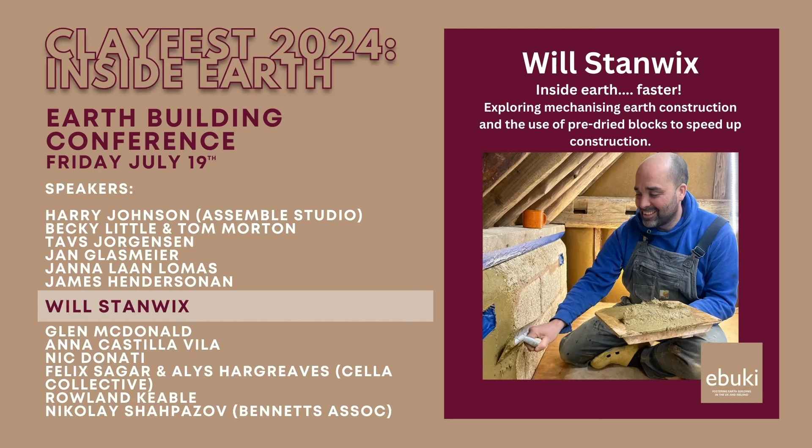My name is Stanwix, and I've worked in natural building for the best part of 15 years, predominantly as a design and build contractor. And I'm sorry, I always have to read the intro because it's the only bit I ever forget. I love hempcrete, I love clay, and I love solving construction challenges.

When you gain experience with particular materials through failure, triumph, or time, you get pulled into other areas of construction. So I also assist self-builders. There's one here today somewhere. He's out there. Architects and engineers when they're working with natural materials, and I also produce, import, and sell building materials. But predominantly, I'm a builder, and that's where my passion lies.

My journey inside earth began at HG Matthews, where I worked for 3 years, and I finished that about 4 years ago, I suppose, and predominantly focus on avoiding doing labour-intensive things like that, and instead using machinery, earth blocks, and other methods to bring earth building to a new audience. So I'm just going to talk about a few of my past projects which highlight this. Some of you here actually have worked on them, so sorry, you'll know all about it. But here we go.

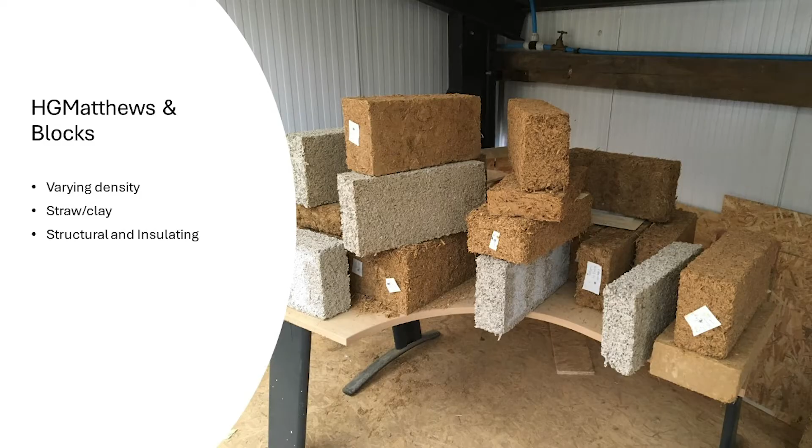So at HG Matthews, I was pretty much set free by Jim, who's up there in the corner, to experiment with their clay and their straw. So we made lots of varying density blocks out of the clay and the straw. The one in the front there is a light earth block, clay and straw. The middle one is, I suppose you call it light hemp earth. It's hemp and clay, and the other one is a hempcrete block.

So we made these blocks, and then we tested them at HG Matthews to see what we could do with them. And the light earth blocks were great. These ones were more like an insulation batt rather than a block because they were so light. So we built an office and we stuck them between the studs. And their thermal conductivity was very low. It was like 0.05. But they were difficult to make, and at the time we didn't have the machinery that could make them on scale, but I think that has changed slightly recently.

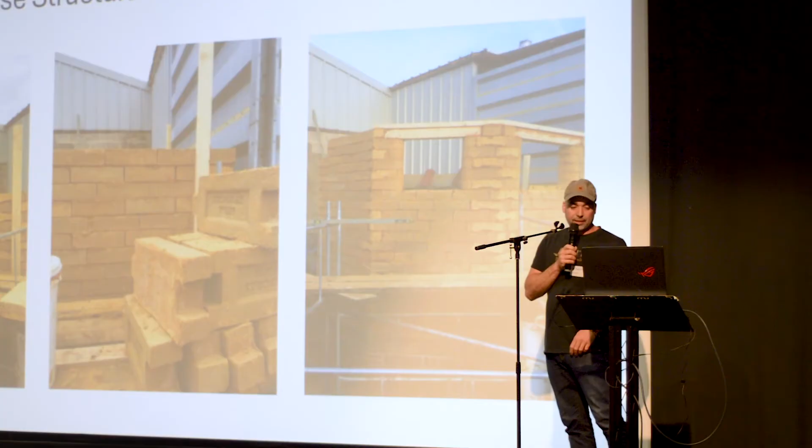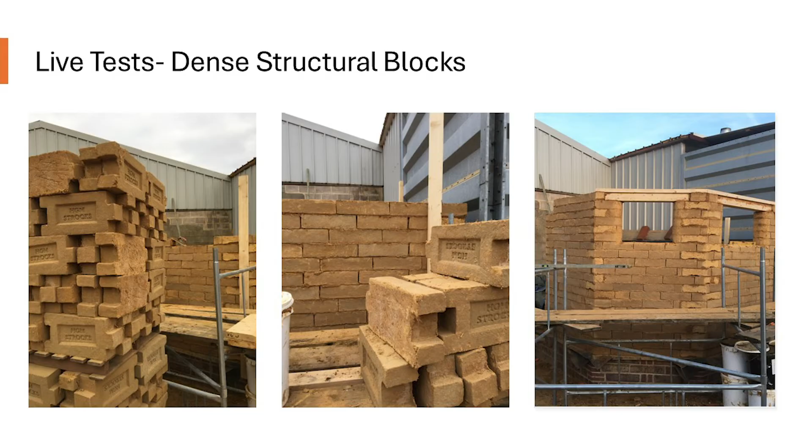So we looked at dense blocks, and at the beginning we made them with a little sort of a notch in them, so you didn't have to put mortar in the perp joints. And we really liked them. We built a new toilet block at HG Matthews, and they were fantastic. And this is the same toilet block. This is a photo taken in January 2018.

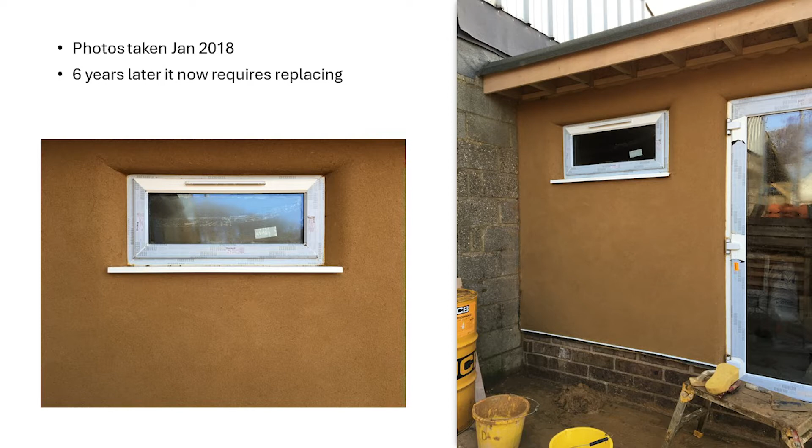And those of you who were at the Brickyard this week, I don't know if any of you went and saw this toilet block, but that is just a base coat clay render with clay, straw, sand. I didn't even put 2 coats on it. For some reason, we didn't get time. And it's only just now needing properly replacing. There's a square that's fallen off it. But the building inside is fine, the blocks are fine, it just needs another coat of render. And there's a very, very small overhang, it always gets rain on it. So it is surprising how tough these materials can be.

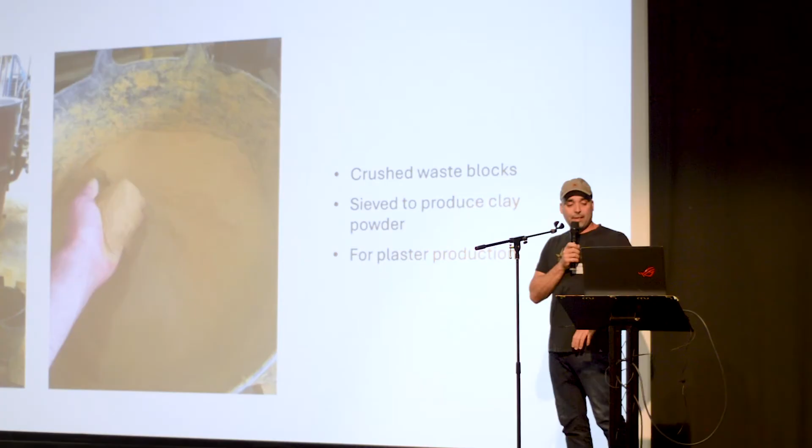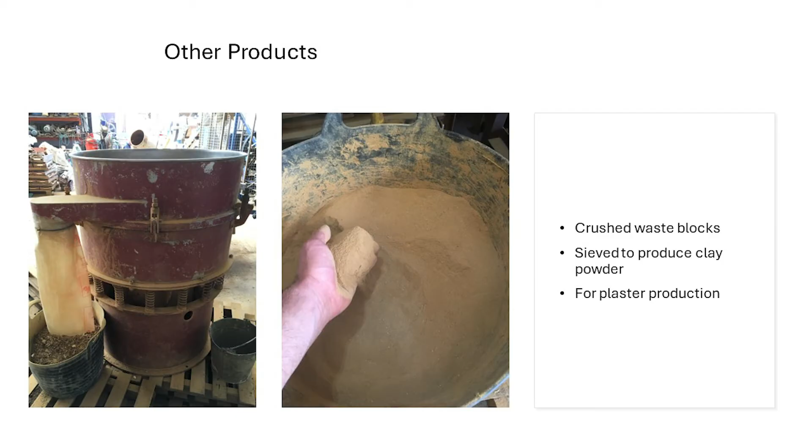So the other products we looked at, this is clay powder. So all the waste products we crushed and we put them through a sieve that's in the picture there. And we made clay powder, which you can make clay plasters, clay mortars, all sorts of things with. And they still make this now, and it's a really, really nice clay for making a clay plaster.

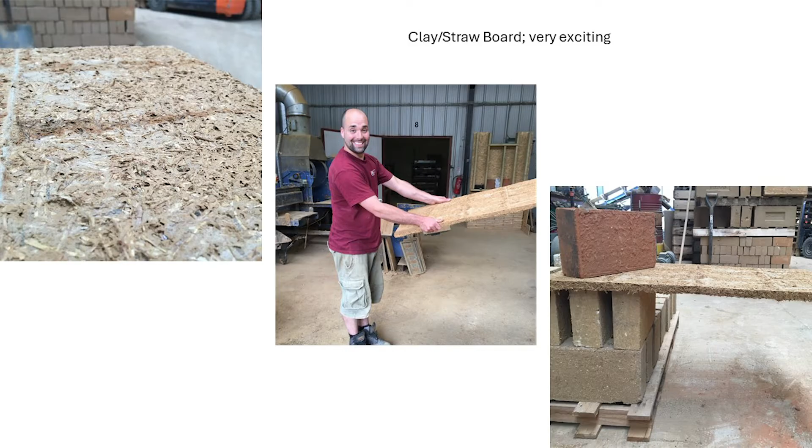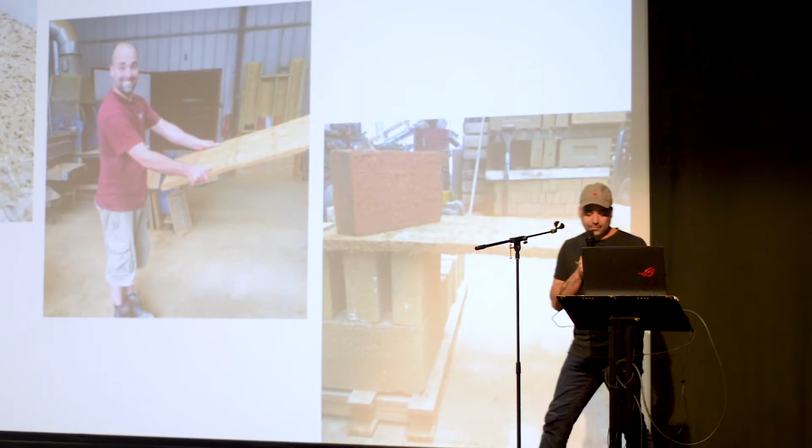Other things we did was a clay straw board, and that was very exciting. But again, to make that on large scale was just too expensive, too much machinery, but park it on the bench for later. But again, 25 mil thick, straw and clay, and it was a fantastic board. Hempcrete blocks were even more exciting for me, but I'm not allowed to talk about that too much. Roland says no.

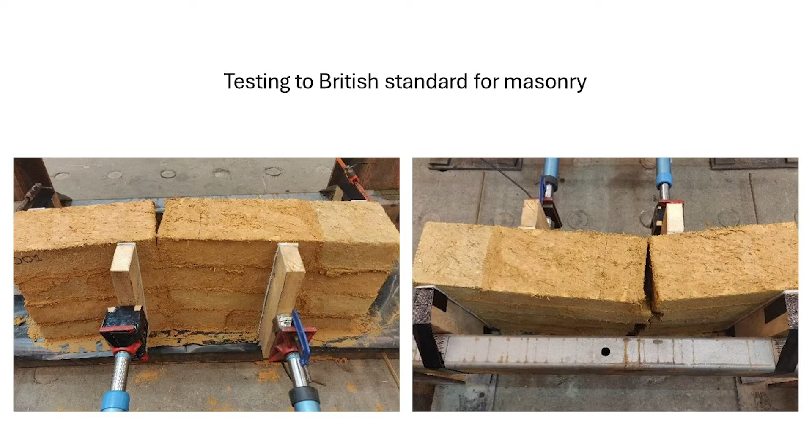So we thought the dense blocks, the strocks as they call them, they're made from the waste clay they dig through to get to the brick making clay and the waste straw from their farms. So we took that forward to testing at the BRE, and they've been fully tested to the British standard for masonry, which means engineers can engineer with them and we can make them properly on site and building regs can be okay with it.

So this is the bit about building faster with blocks: the fact that they're dry, and now we can engineer with them, and now we can build houses with them. So structural earth, we took that through to what you'd say live tests, and this is a garden office nearby.

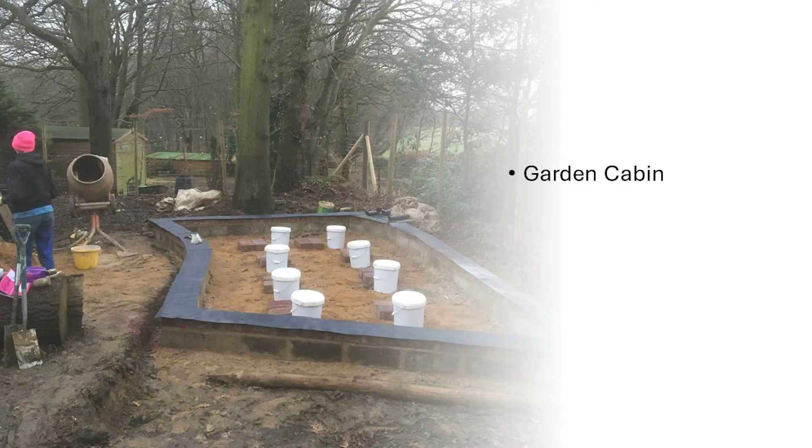Sit it on a masonry plinth, and we built a little cabin for a client just to see, just to get to know them, so we can tell other people about our experience and give them advice. And they're great. We found out you can drill straight into them with big screws, which means you can drill these posts in and plumb and run your strings off that really, really easily.

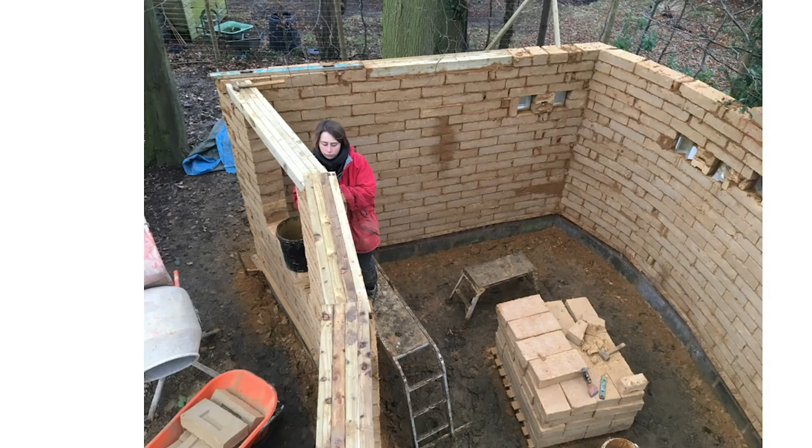We built it in the winter, too cold for lime or cement when we were building this, but actually, as long as you could mix the clay up, it was perfectly fine to build with. You did, however, have to cover it over at night from potential of rain. And again, the lintels just screwed straight into it. And we managed to get a nice thin joint because they were quite regular.

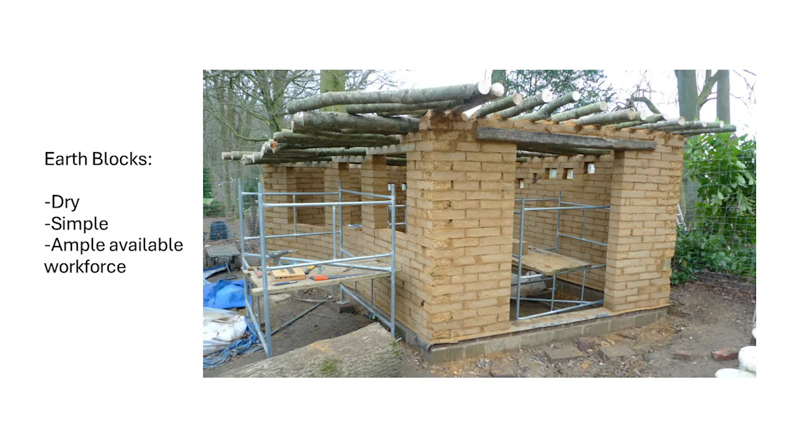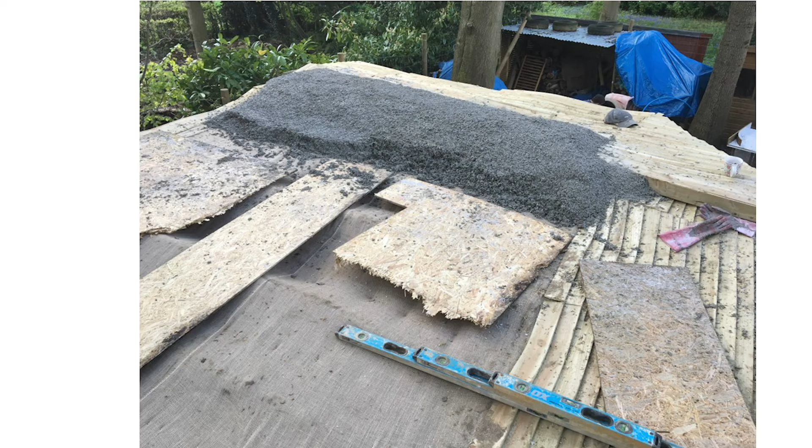I'm going to skip through this bit pretty quickly because it's about hempcrete. So we put the roof poles over. These poles are from the neighbour's garden, and then Hessian straight on top of the poles, stapled down, and hempcrete poured straight on top of the Hessian. So there's no plywood deck or anything like that. It's essentially a hempcrete roof deck.

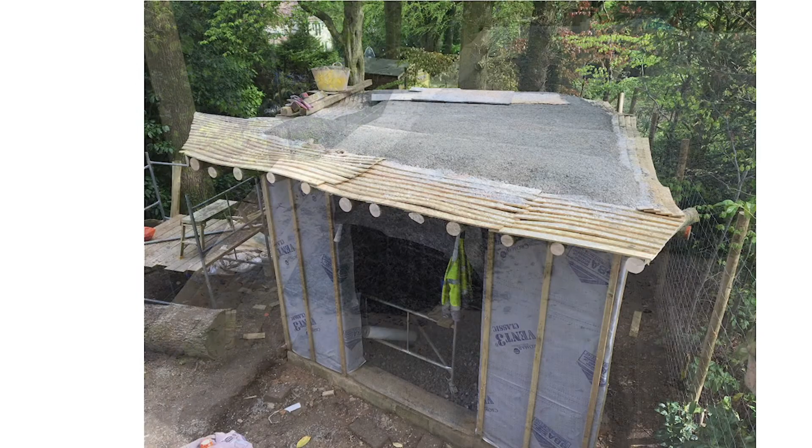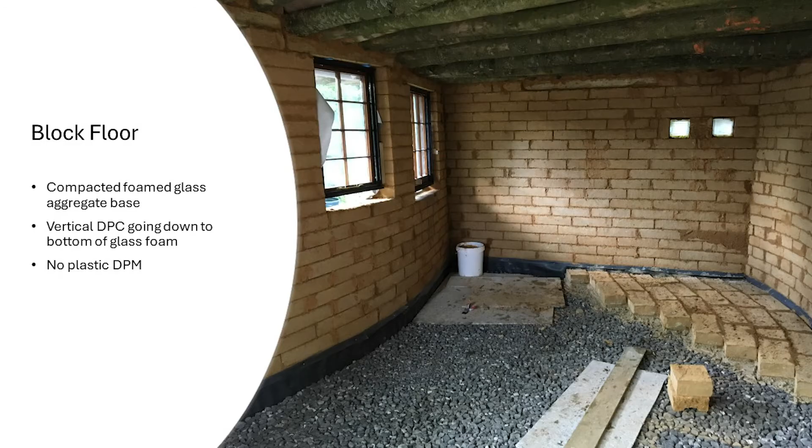Inside we did a strock floor, so the foam glass you can see at the bottom, and then, very important, the damp-proof course comes down to the bottom of the glass foam layer, and then laid the blocks straight on a lime mortar with a clay mortar between them. We were going to do a poured floor at this point, but the client liked the look of it so much we kept it. We plastered it, and then we oiled the floor.

That's the cabin there, painted with clay paint. And they came up really nicely. They came up like flagstones. We oiled them with linseed oil and then beeswax on top. And they're really, really tough, really, really strong, which gave us the idea for cutting them into little tiles if you had a screeded floor.

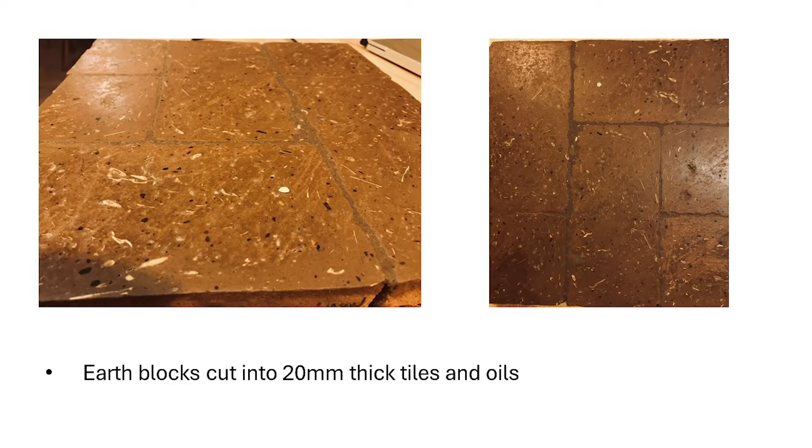So it's the strock itself cut into 20mm sections and then laid. This is a sample for a customer, but they were laid as a floor tile. So there's 2 flats in London with these floors. And on the buildings tour, there's a building called the Surge Hill Project that we've got a floor like this. And then the big live project, Bellingdon Village Nursery, which you'll get to see as well on the tour.

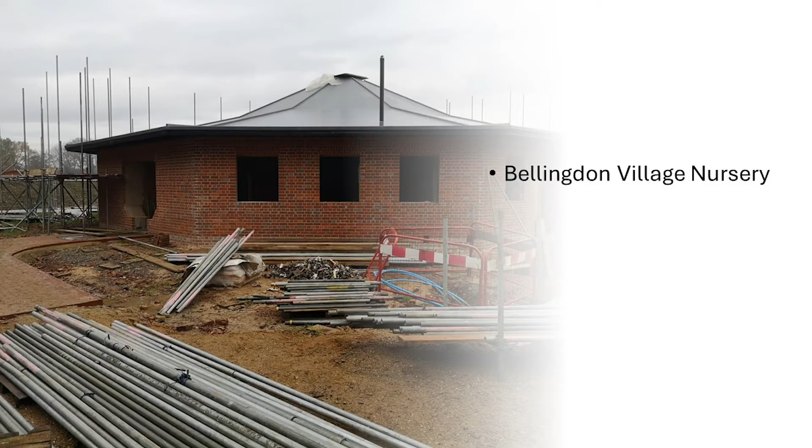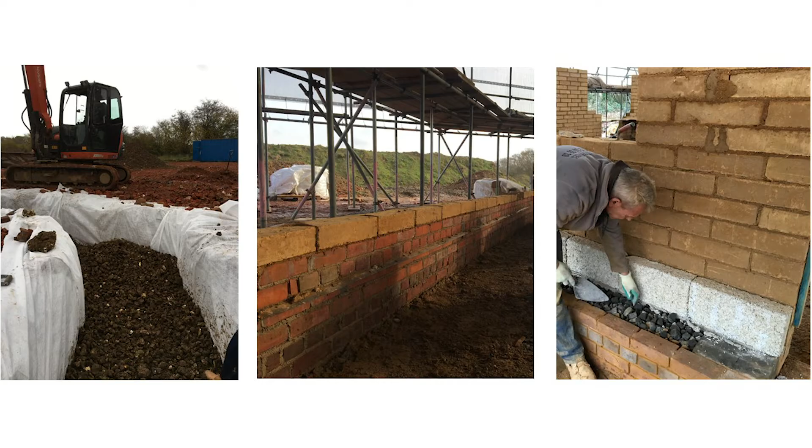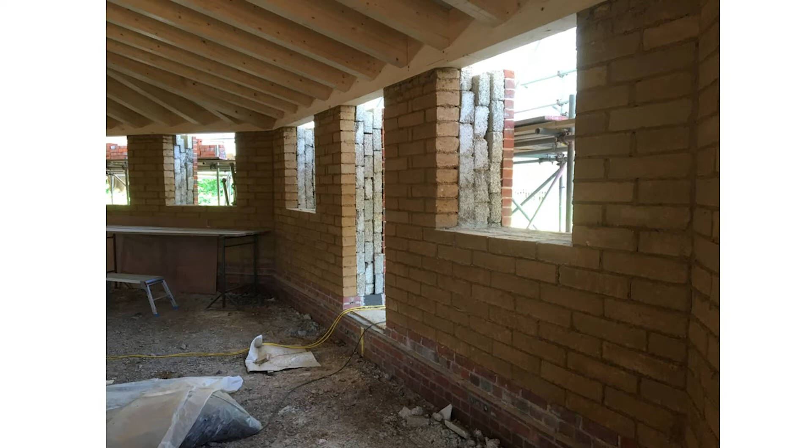This was built by HGMatthews. This was the big test for the earth blocks. So we've got a rubble trench foundation, brick plinth, and then start the blocks above the DPC. Hempcrete again, hempcrete insulation. And there you can see all the big roof structure all sits on these, and they're 160mm wide. They're not even the full size one. 300mm of insulation and a brick skin on the outside, and that now has a green roof on it as well, so those blocks are taking a huge amount of weight.

And if any of you have been there or heard about it, it has a central dome as well, so it's really worth going and visiting it. And that's, again, the same mix as the strocks, the earth blocks, but a special shape for producing that dome.

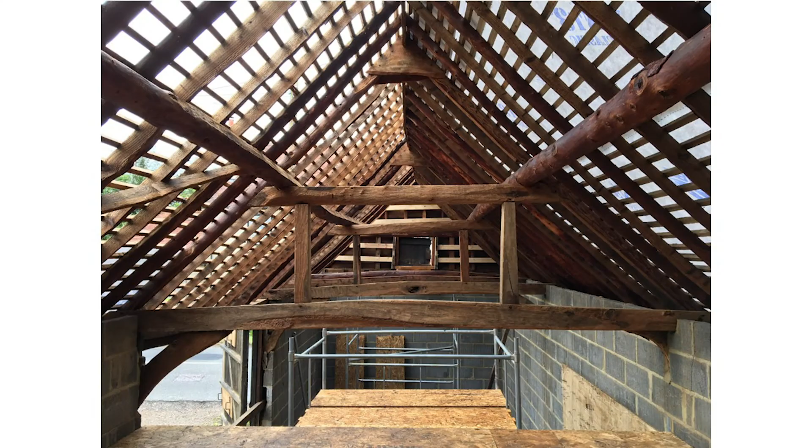So after I finished at HGMatthews, I started thinking about earth as insulation, because I do a lot of hempcrete, which I'm going to try to stop saying now. And that's insulation, basically. So this is where I thought I'd test it on my barn. So this is the roof structure of my barn at home. And I left the old laths on because they were oak and nailed very well into the little rafters, and I didn't want to take them off and risk breaking the rafters.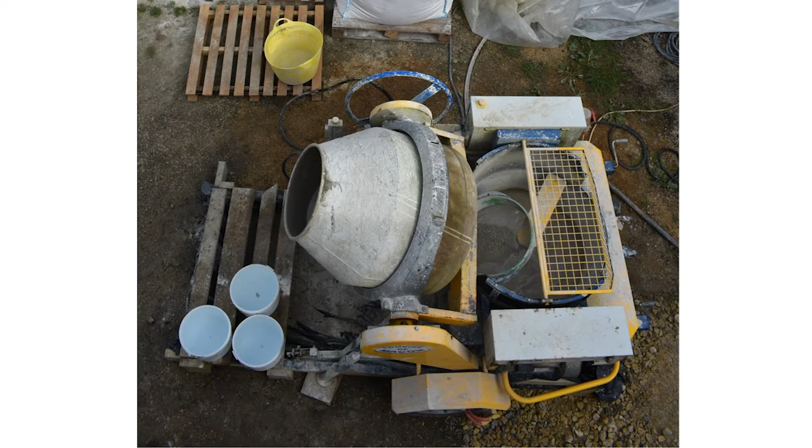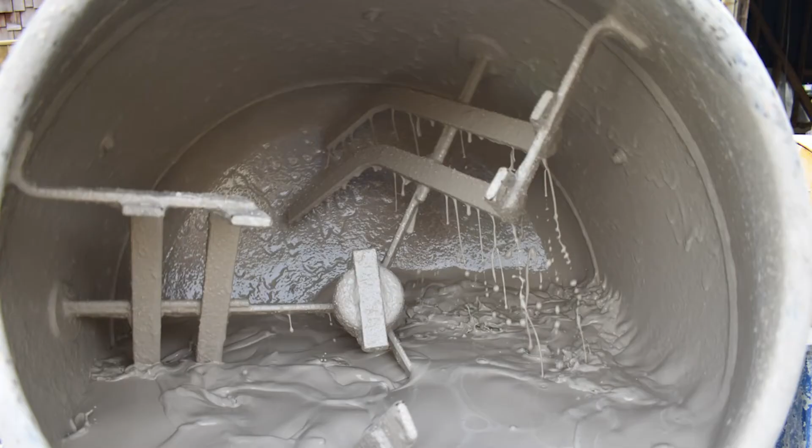And I got this machine. This is a hempcrete spray machine. And so you put a liquid in here, and it tips it over and pumps it from this thing here. It's an agitator or a pan, and it pumps it up to a nozzle. And have I got the picture of? Yes, and the hemp goes in this separate box here. So that's a picture of the clay slip in the drum. So that is clay powder and water, which gets pumped to the end. And the hemp, dry hemp, goes in this box here where it gets blown to the end.

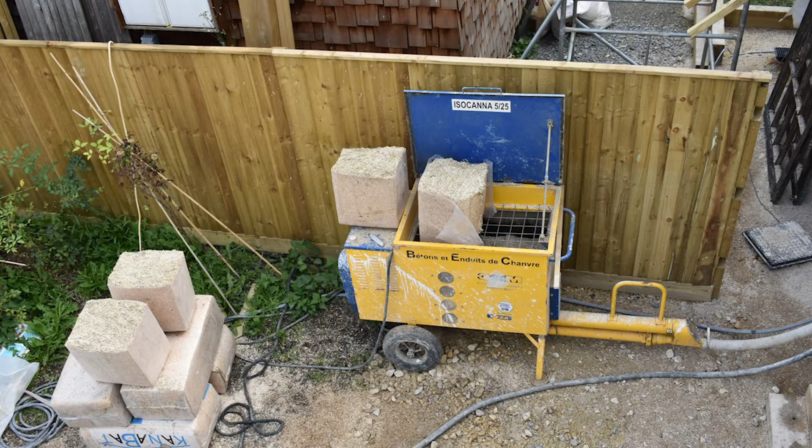This pipe here carries dry hemp right up to the person on the lance or wand or whatever you want to call it. This carries a slurry, so it could be a lime slurry or a clay slurry. And this carries switch wires and compressed air. So that all gets pumped up to the person, or the hemp gets blown, but it all goes to the person at the end, and it comes to this. So you get your dry hemp coming out through the middle, and then the slurry gets sprayed with compressed air through those nozzles at the hemp.

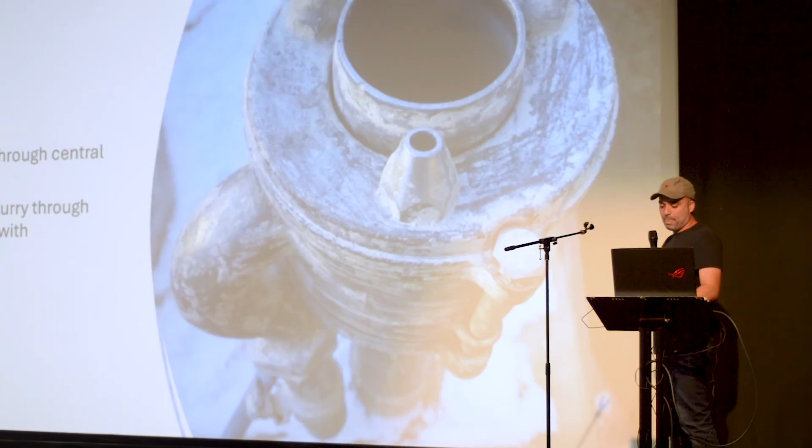So the hemp's sort of twisting through the air, and then the slurry's spraying at it, and then it mixes in the air and sticks to the wall, or wherever you're spraying it. So this is a Hempcrete spray machine, and this is what it's been used for, and this is what it was designed for, but I thought I'd try it with clay.

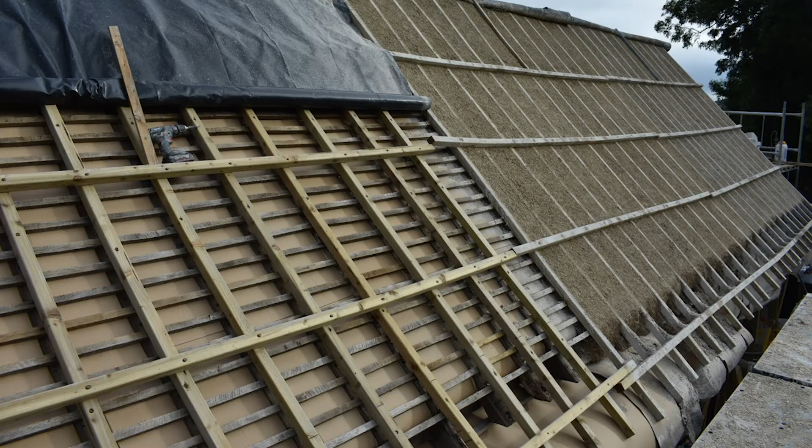So I stapled this cardboard to the underside of the roof. It's stapled to the old roof battens. And then I piggybacked with this 2x2 on top of each rafter. And this was just for me to stand on as I did it. And then I stood there on those and sprayed the insulation down at the roof.

And that shows it there nicely, the cardboard that I put on the underside. Once it was finished, I scraped it all off, and I got a lovely flat roof. Well, not flat, but a lovely smooth roof like that.

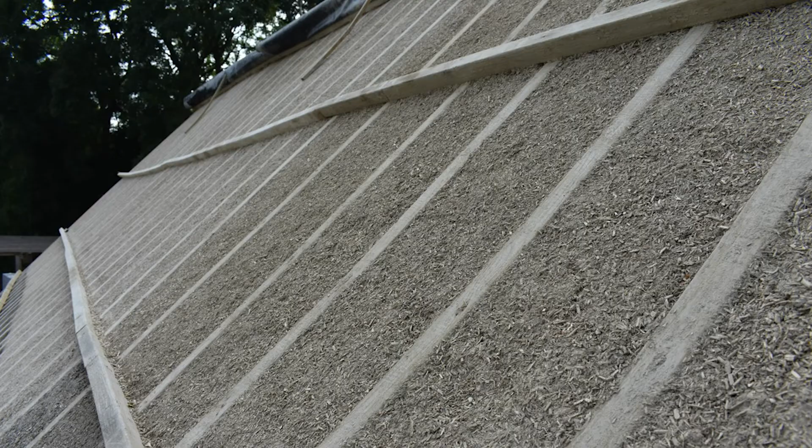That's my dad. He's 60-something. I've got a bad back, and we did that in a week fairly easily between us, and that's what he was doing most of the time. So that just shows how easy it can be. You know, you could do it with hands, you could do it with lots of people, you could do it with buckets, but you could also do it with your dad.

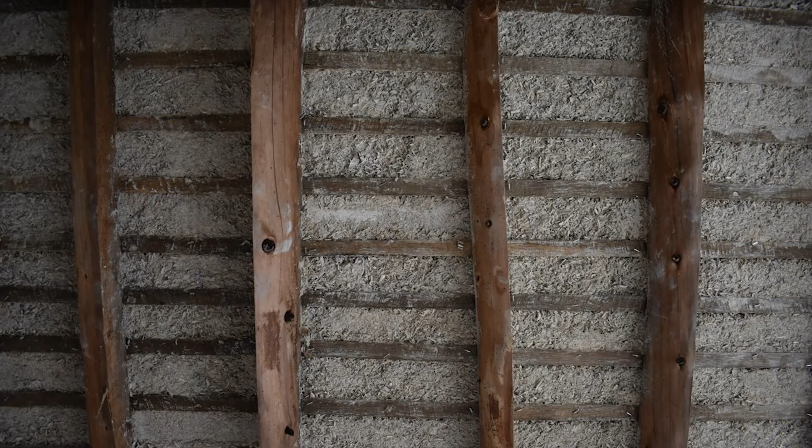Then on the underside, 24 hours later, I pulled the cardboard off, and that's what I was left with, a nice substrate to plaster onto. This is just showing the Hempcrete wasn't enough insulation, and I've gone with 2 skins of 50mm corkboard, which will keep the undulation of the roof, and it's the lightest board that I could think of because my rafters were tiny. And that's the finished roof underneath the new tile battens.

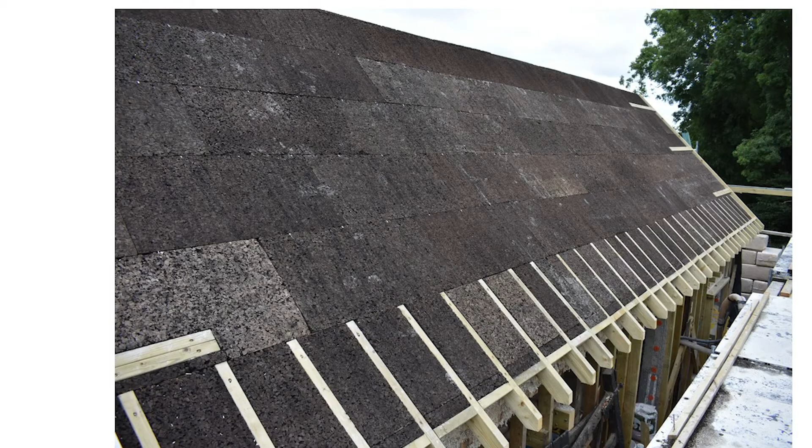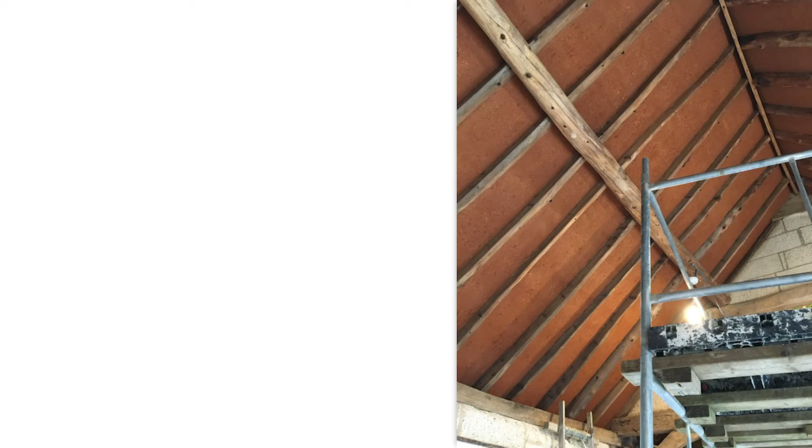And so the barn's about 300 years old, and the original tiles went back on, except the broken ones. And the broken ones, I bought another machine for, which we'll see in a minute, which crushed them up and mixed them with clay and straw and plastered them on the underside. So they spent however many years on top of the roof, and now they're broken and they're on the underside of the roof. And it's quite nice because you've got clay as the finish, clay as the insulation, and fired clay on top of that as the roof finish.

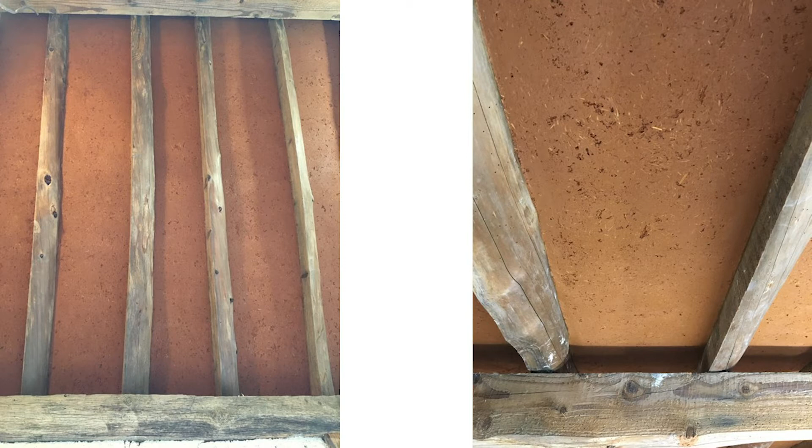It's just a couple more shots of it. And if you visit, my barn's also on the visit list tomorrow, and you'll notice that I like textured plasters. And the tiles went into the mixer as buckets of broken tiles. They weren't crushed and sieved and this and that. They just went in as buckets of broken tiles.

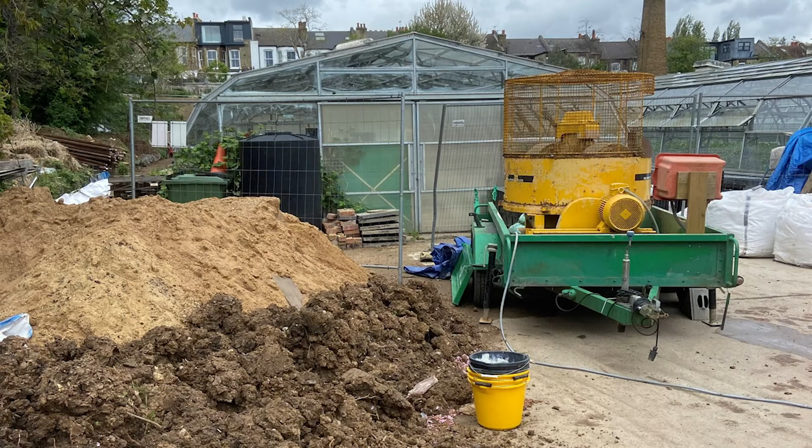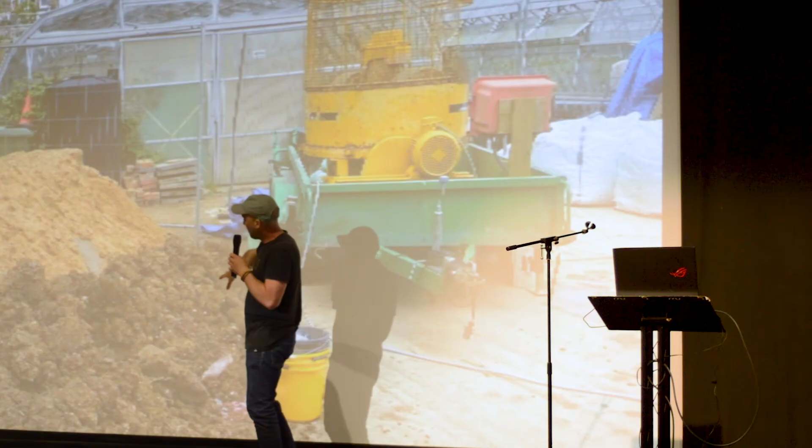So then I thought about site processing. This is in North London, Wolves Lane, a community project. And that's the mixer I'm talking about there, which a lot of you would have seen during the week. It's got 2 big wheels that go round and round and crush everything up. This is the clay we had. So it's 3 straw bale buildings. This is the clay we had, and that's the sand that was left on site.

I need a clicker thing, don't I?

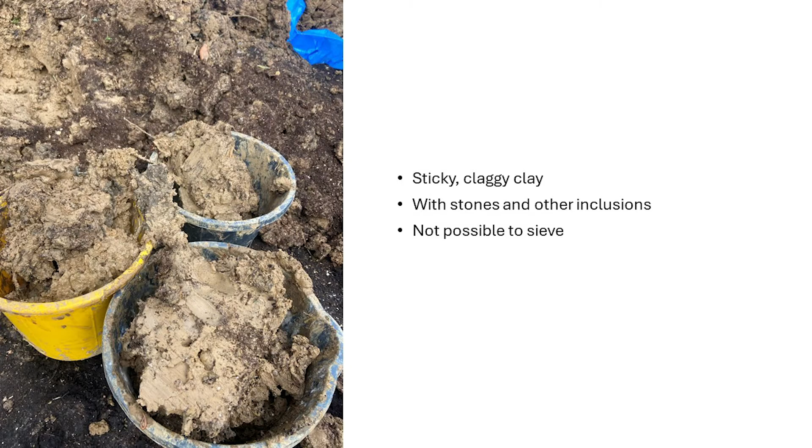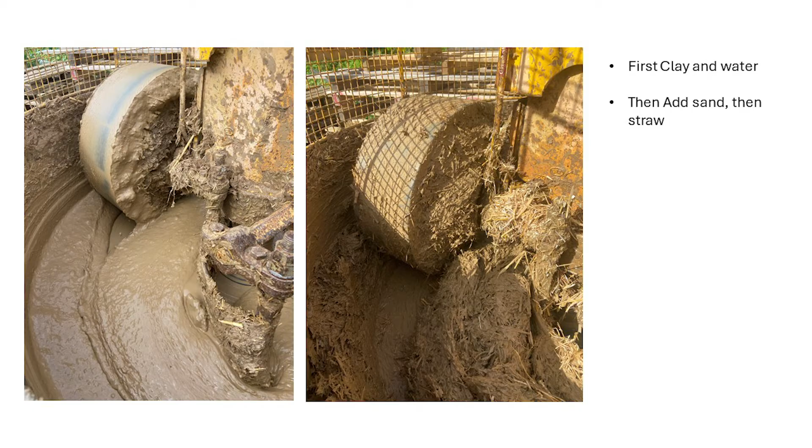The clay is sticky, it's claggy, it's got little bits of roots in, it's got little bits of this in, it's got big stones and small stones. You wouldn't want to try sieving it, you'd have to dry it first, and this is where the big mixer comes in. It just crushes it all up. So I put water in first, it makes it all into a nice slip, crushes all the stone, and then the straw and the sand go in afterwards.

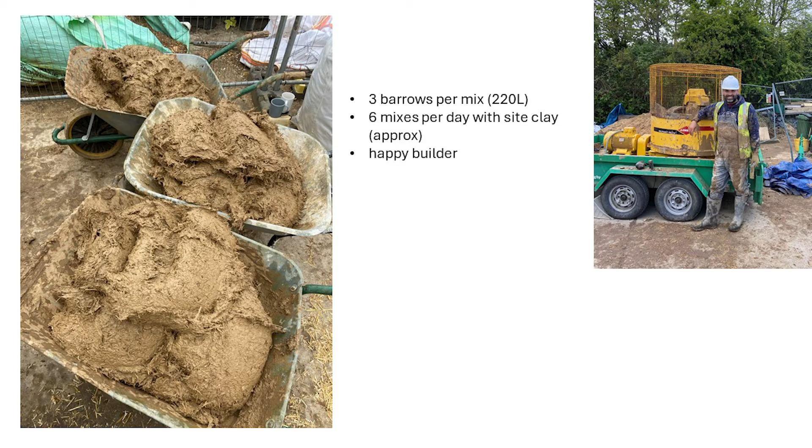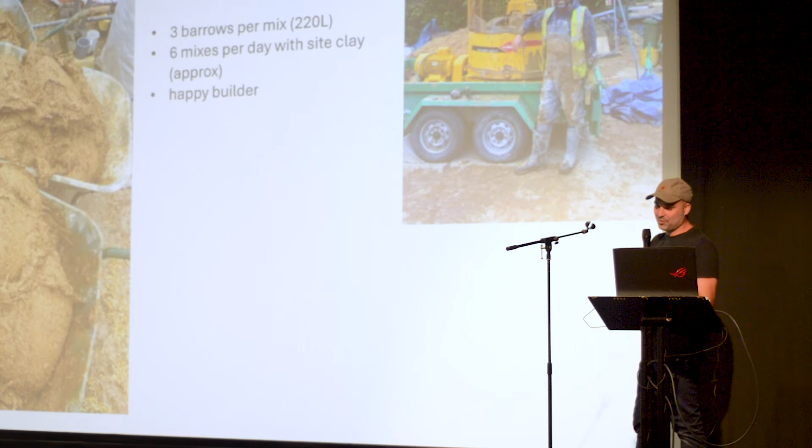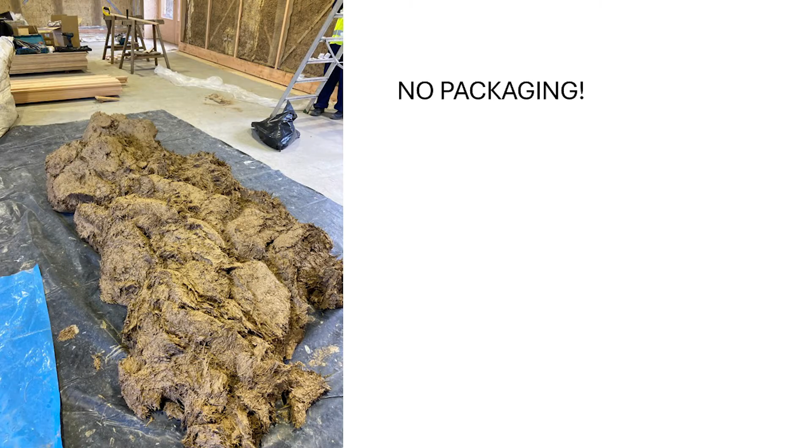And then you've got each mix, 3 barrows per mix, 6 mixes a day, happy builder, no dancing on a tarp, which I'm not dissing, but it's a lot quicker. If someone's paying you to do a job, this is how I'd do it. I should say it wasn't just me, I've got Brian as well, but he doesn't like to be photographed. And then it wheelbarrows into the building and tips on the tarp, no packaging. No plastic, no paper, no waste, just there it is, and those are the straw bale walls it's going onto.

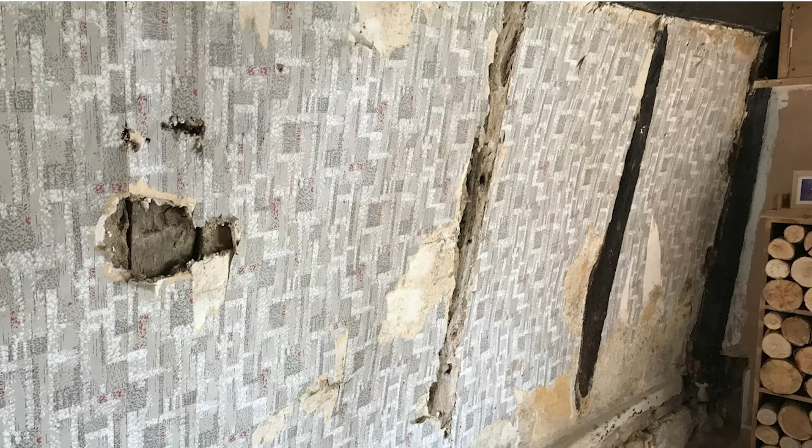Another use for this, once I got this mixer, I started thinking of all these uses for it. So this was a dividing wall in a 15th or 16th century building, a little hovel in Padbury, just a bit north of here. So it's a dividing wall between two houses, which weren't two houses before, so it's only this thick, and they can hear each other's televisions and stuff like that. And obviously in need of repair.

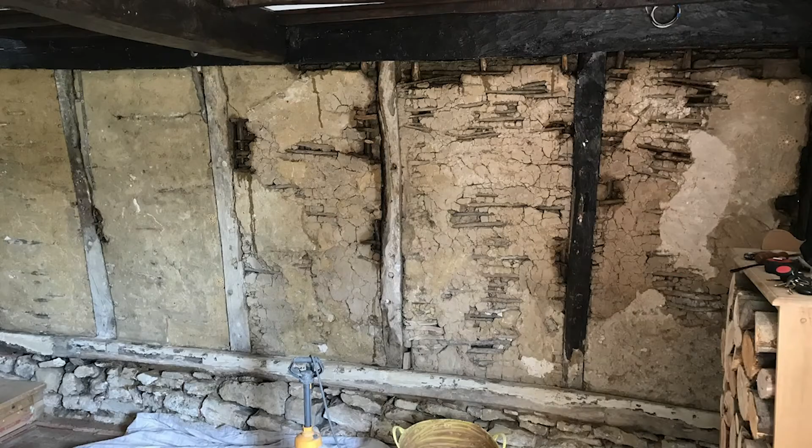So all the layers over the years came off, the wallpaper, only a tiny bit of gypsum actually, and a tiny bit of cement, so it wasn't too bad, and then layers and layers of clay plaster that had gone on over the years, back to the original. And I tried not to take too much of that off.

So I wetted up the little areas where it was worst, and mixed up this mix, which worked really well: 1 clay, 3 hemp, 1 straw. And I put this on by hand, even though I'm supposed to be using machines. And there we are, fixed up all those areas.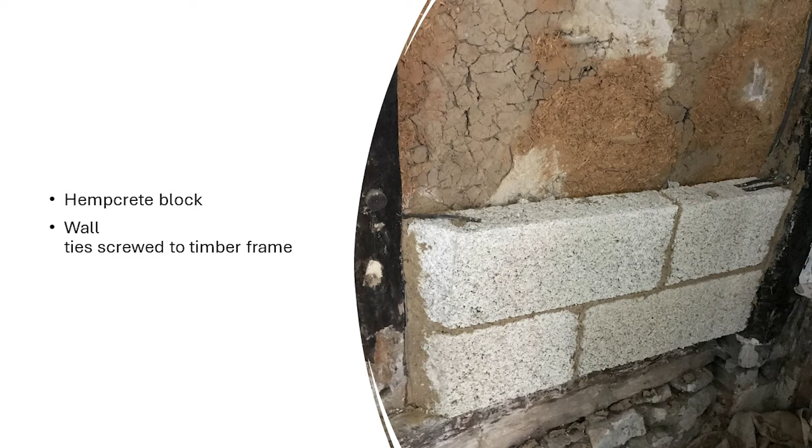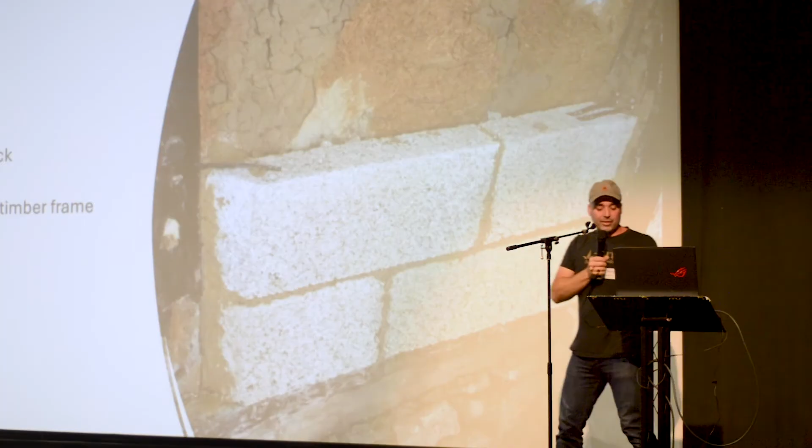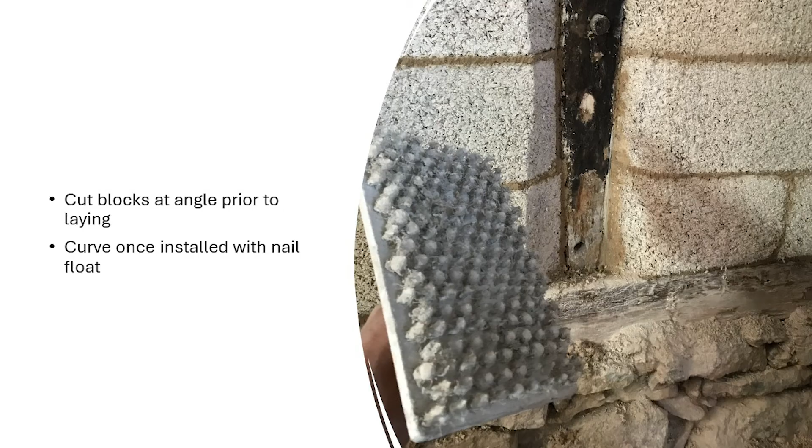And then hempcrete again was specified as the sound insulation between the two cottages. The only mark this will leave behind is a couple of screw holes every third course, so a very non-invasive way of improving the sound insulation. They were cut first with a saw and then shaped round with the nail float and left a lovely curvy wall.

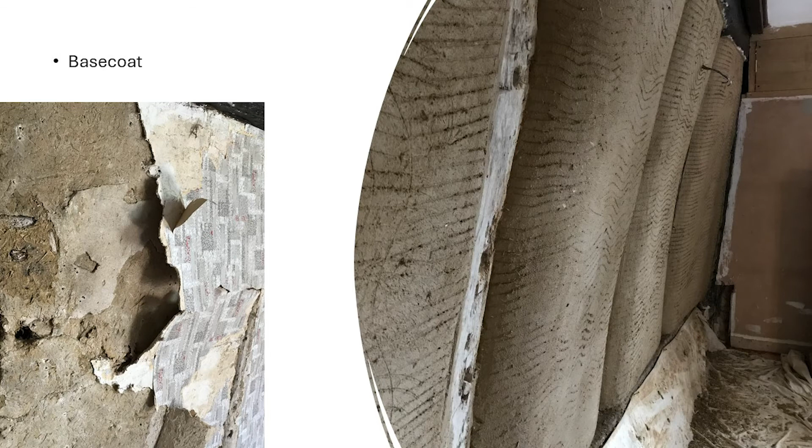And then the base coat plaster, all this stuff that I took off before, I stuck it all in the roller pan mixer, crushed it all up, only added water. The wallpaper was in there, that all disappeared. Everything I pulled off that wall went in there, mixed it all up with water, and plastered it straight back on the wall. So you've got 300 years of history mixed up and slapped back on the wall.

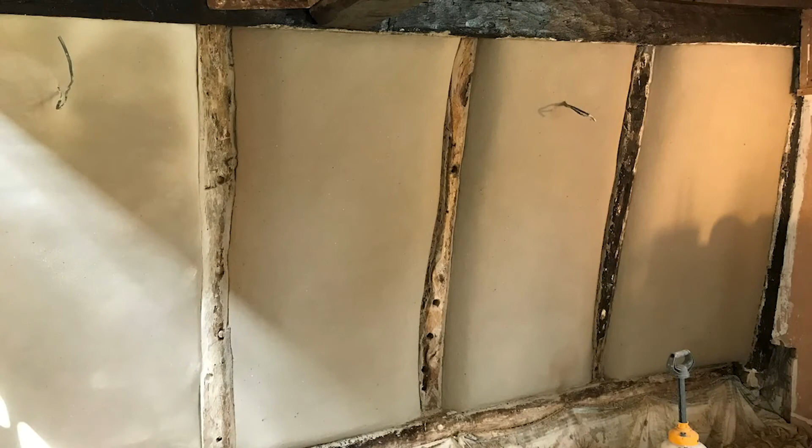And then the top coat, which was the thing with the mixer, once you have one, you can think of all these different uses. And then I managed to find a very local clay to do the top coat with, and so that's a top coat clay plaster over it. So then I thought, what if I take 2 machines to site?

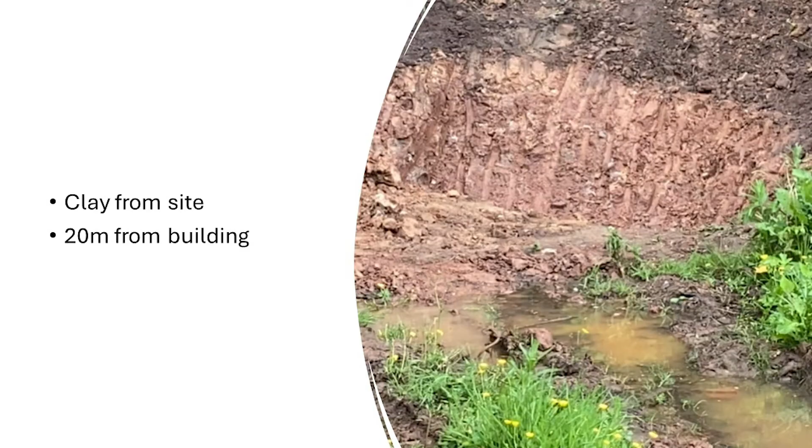So this was like the A-team turning up, and this is Lee over there. This is his place. This is like what I'd been dreaming about. There was a digger as well, obviously. Digger digs a big hole in the garden, about 20 meters from the building. That went in the roller pan as slip. Just a load of water with the clay, smashed up all the stones, left it in there for half an hour, maybe a little bit more.

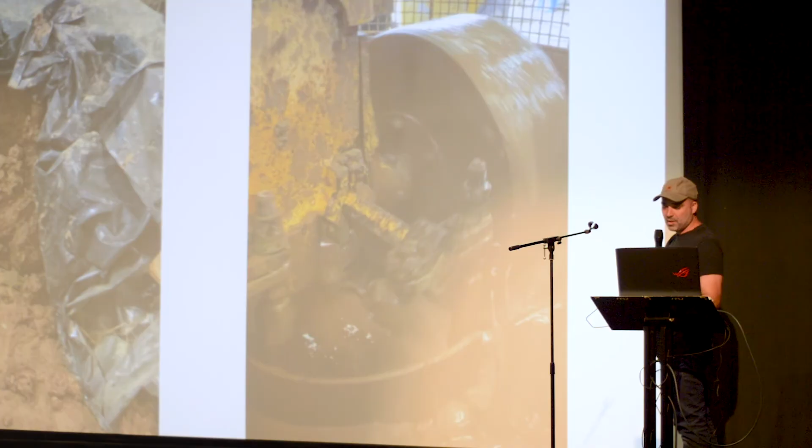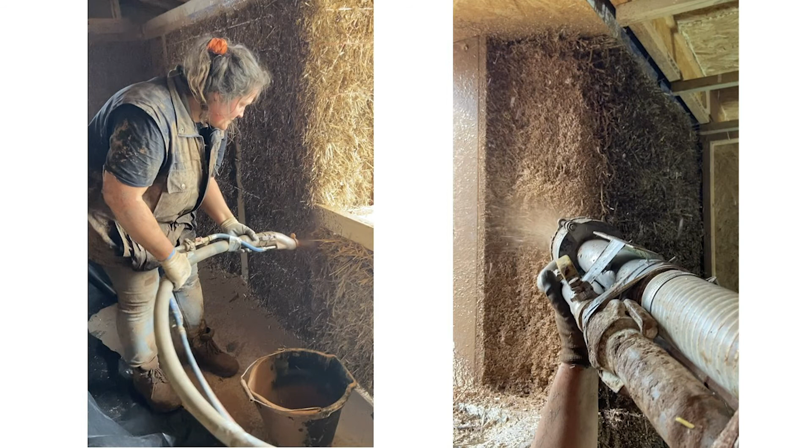Poured into the back of the spray machine, pours over into that agitator that you saw before. And Annie and Jack, Adita Builds, now own this spray machine. And she's spraying slip on the straw bales just before the plaster coat. And that slip half an hour before was out in the back garden.

And then switch the nozzle over, attach the hemp box, and this is the one that's spraying the hemp and clay. So she's building out the window reveals, and we also went over any timber studs in the wall that didn't have straw on, and filled out any big holes in the straw.

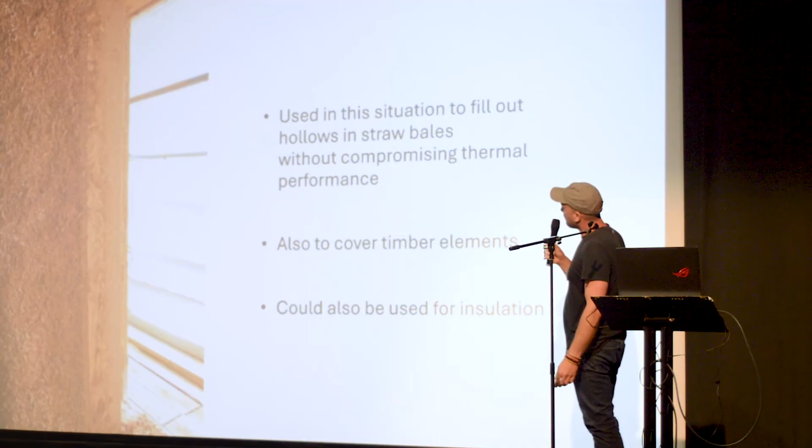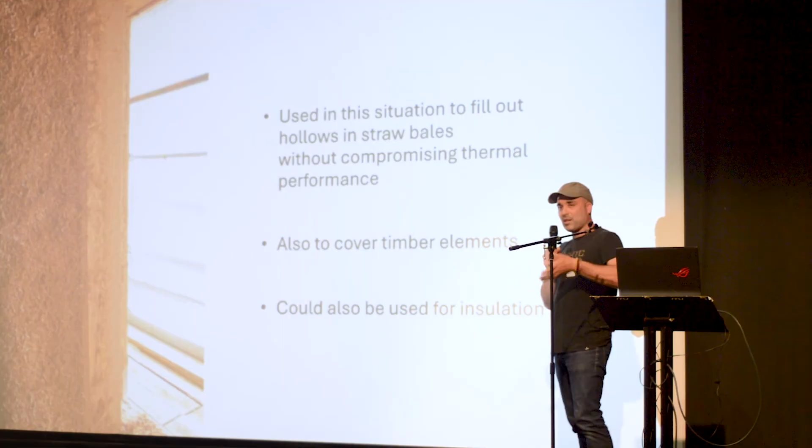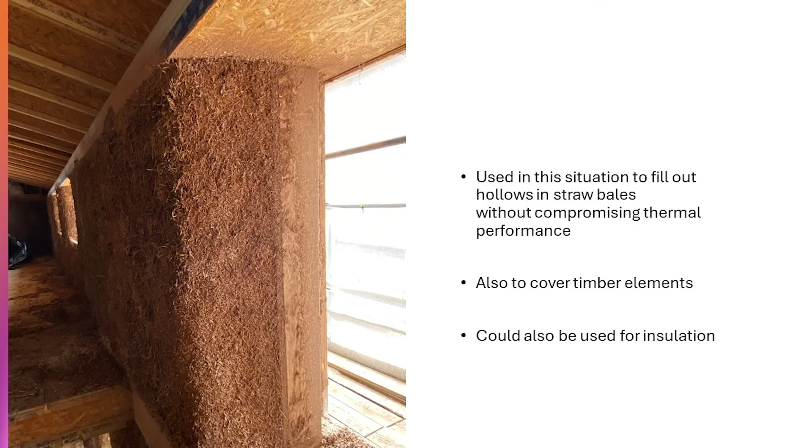And yeah, the clay was just 20 meters away, and we processed it to a point where it can go through a very complicated spray machine, and everything in that slip had to be less than 2 millimeters to go through that machine. And it's created this lovely material which is insulating, it's clay and it's hemp, and it's going to be perfect for plastering over. So I thought that was pretty good. I've done 2 of these now, and hopefully I'll do one that doesn't have the straw bale, and it's just a hemp light earth build.

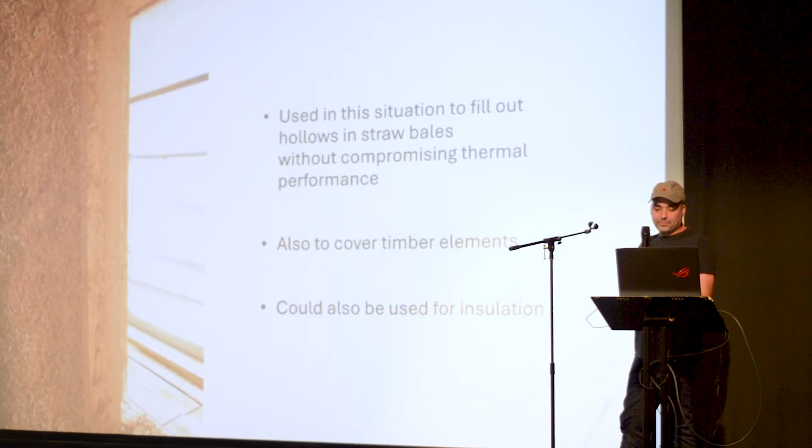Oh, I must be getting to the end, am I? Oh. So that was the end, but this is a little bit after it. That should have been 25 minutes exactly. I wanted to say quickly,

3 minutes. So Clay Wall is a plaster I came up with over the years of making different plasters for different places, testing it at different people's houses, getting other people to use it, sending it on courses like last week to see how people find it. And it's a very good plaster. It's easy to use, it's robust. It has 3 ingredients: clay, straw, and chalk.